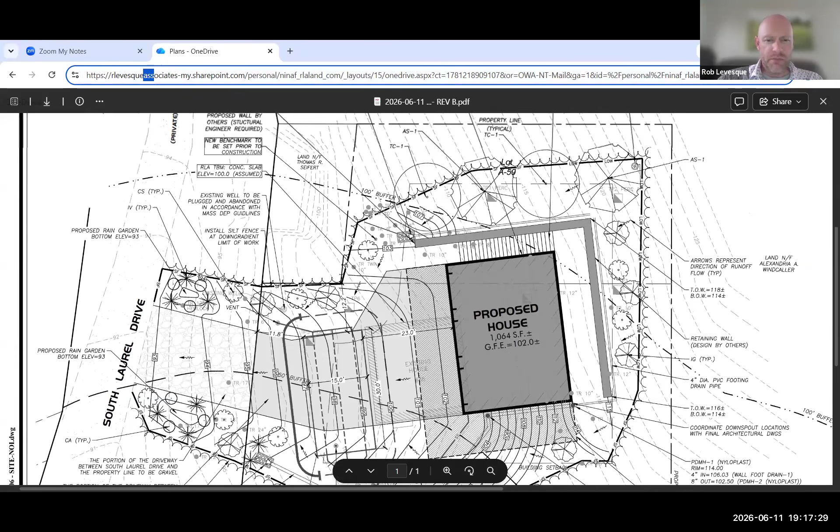So I'm not sure exactly what you're seeing. Hopefully this bar is not in your way. Are you guys seeing the plan? Yep. We see the plan, maybe not the whole plan, but we've got the house pretty centered on what we're looking at. Yeah, I'm zoomed in a little. I can zoom out if you'd like. If there's a way to do that. Let me go. So this is the overall, and then I can zoom in as we go, I guess.

So again, we had the public hearing. There were questions raised related to a number of items. I believe we've addressed all of those. Specifically, we're showing again the proposed home, the deck. There is a retaining wall that you see here. There's also the septic system. Just for clarity, the septic system has already been reviewed and approved by the Board of Health.

There was also, I believe, a question, at least I think we saw it via email, related to the Zoning Board of Appeals. There is no specific filing required based on the review of the building department related to the ZBA, just because we're meeting all of the setback requirements. So I think that was one of the questions that needed clarity.

So that said, the septic system, as you can see, is in the front of the house. There was some concern about the slope, and traversing over that septic system. So we've added bituminous pavement to at least the limit of the property line, as discussed in previous meetings.

I'm sorry, we have dogs barking off in the distance. If you can hear that, I really apologize.

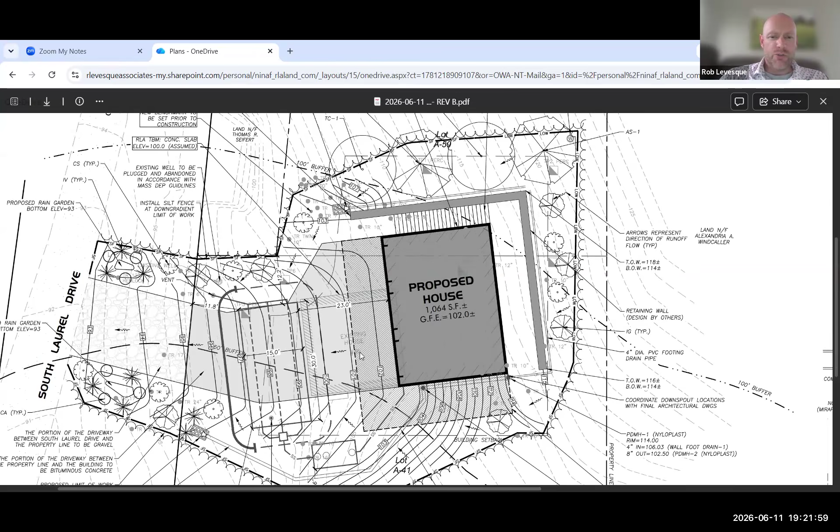So in the process of dealing with that, we did count the trees on site. I believe there was a site visit conducted, and Cole Modesto from our office attended the site visit and quantified the trees and some of the species. And we have prepared, and on this plan, I'll zoom out again. We've prepared a one-to-one replacement of those trees. So within the limit of work, we're showing trees and/or shrubs to be located within the site to essentially revegetate around the proposed work.

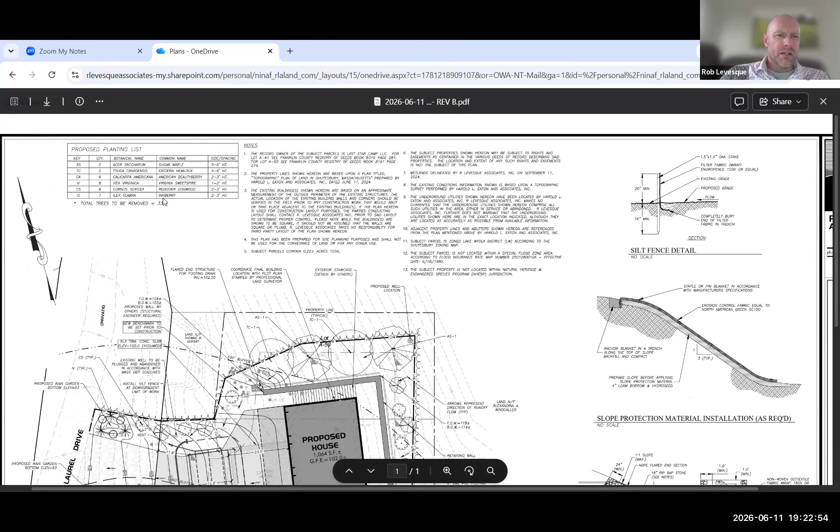Obviously, in the areas that we can provide them. Obviously, don't want them over the septic system, can't go over the driveway or the house or the decks, but anywhere where we felt that we could appropriately site them, we certainly did. So there is a detail of that, the species that are proposed. And there's, I believe, a table if I can find it here. So up on the upper left side of the plan, we have sugar maple, hemlock, beautyberry, Virginia sweetspire, and red osier dogwood, as well as inkberry. So we have some shrubs and some trees.

And again, those have been sited in what we believe is a logical location. Certainly, during on-site activities, if the commission wanted a condition where they were to review the final location, final resting place, so to speak, of those plants, we certainly would be open to a condition such as that. So I'll stop there for a minute and see if there's any questions through the chair, and I can certainly address any other items that you think I might have missed.

Thank you for adding a whole lot of stuff that we've asked for. I think at the site visits and at our last meeting, we talked a lot about stormwater, and I think you guys have really addressed it very well. I'm just kind of looking again, in addition to getting the plan a little late, we got these comments from a member of the public a little bit late, and I'm trying to just go through those to see if there's anything. They do bring up again the potential of moving the septic further away from the wetland, but based on where the well is, I think is the reason that it is where it is, right?

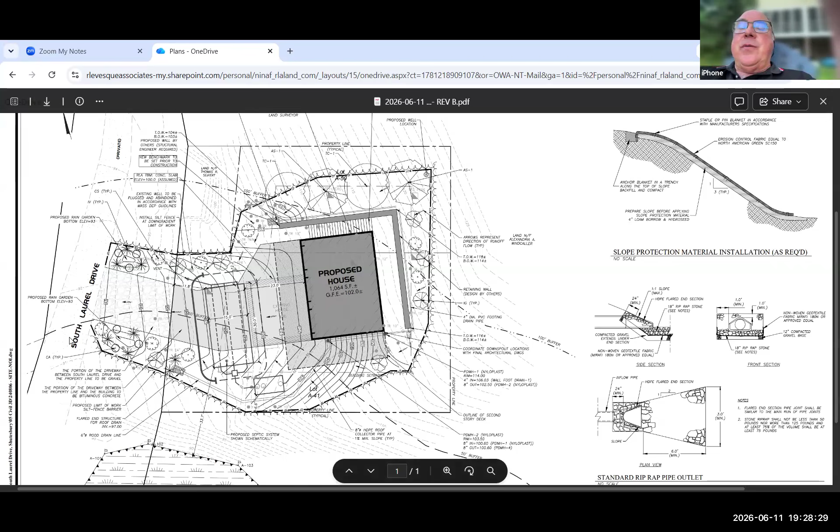So, the commission is issuing a permit for the work to be done on the co-joint lots you discussed. But there certainly is work within the 100 foot that's taking place in that area that's marked Laurel Drive. So I don't think we can issue an order for that because it's not part of the application. If it's owned by somebody other than the proponent, we would need their signature on it.

So if you could, before our next meeting, look into the ownership and the feasibility of doing that work. Is there an easement that allows this type of construction on that? Can you get a signature from the owner or whatever? Because I don't believe we can give an order of conditions for a piece of property that's not part of the application.

That's actually great, it's nice to get some accurate procedural questions. I tend to agree that we want to ensure that if and when the commission decides to issue an order, it's procedurally correct. I think Linda has a response to that because we talked at the site visit about it and the Gribcos looked into it, right? Yes, we did.

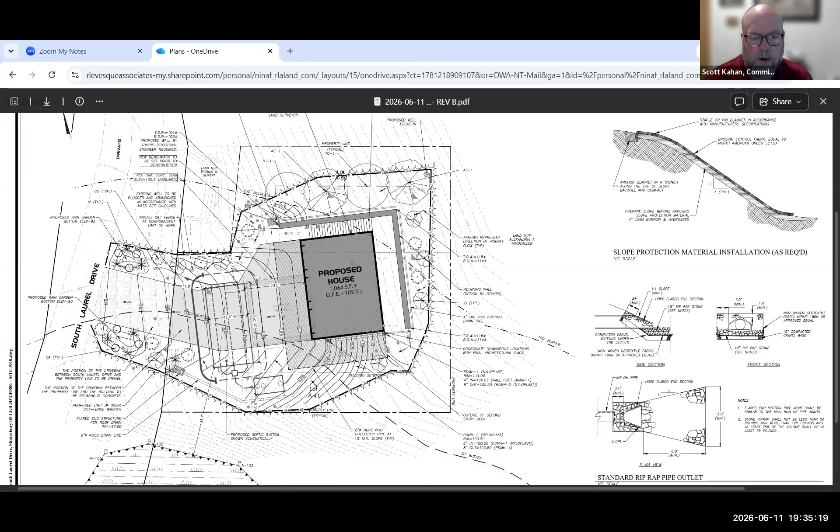Gotcha. So the water from the rain garden, you expected it would infiltrate the same direction, part of it going west, maybe ground into the lake, maybe part of it going south into the wetland. I think that's an accurate statement. Yes. Okay. And that relates then to my next question, which is the leaching field, which isn't that far away, but half of it's contained within the 50-foot buffer.

I'm thinking about nitrogen and phosphorus coming from the leaching field and going into the wetland, and I was going to ask about the permeability of the soils and if we expected it would go there, but it sounds like from what you just said about the rain garden, you would expect that it would go there, down to the wetland. The leaching field may leach into the wetland to the south.

So what I was saying about the rain gardens is that if you get a microburst or a large storm event, eventually the rain gardens would fill up and sheet flow generally to the west. But you can see the contours kind of bend here. So depending on where your water droplets are, or if they come off the slope, they could go towards the wetland. As far as the leach field, obviously we need permeable material under Title V. They allow anywhere from 2 minutes to 60 minutes per inch.

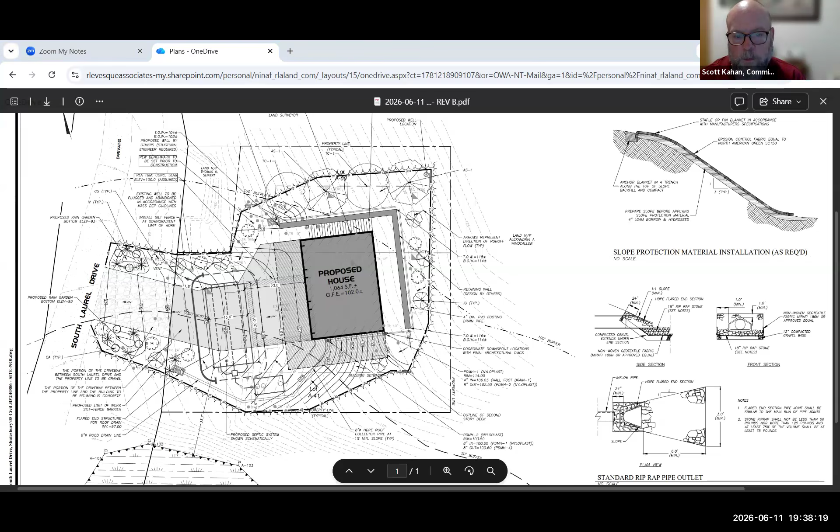Yeah, I understand it, and of course you understand this too. The Board of Health is probably looking at it differently. They're looking at the impacts on human health and the Title V regs. This is being constructed in the buffer zone, in a protected wetland. And so I'm most interested in: is there potential for the leaching field to impact the protected wetland, given its close proximity?

Understood. There is an impervious barrier included, I've noticed, in the septic system design that would prevent horizontal migration of effluent, at least superficially. Let me just see if I can find the rate for you as well.

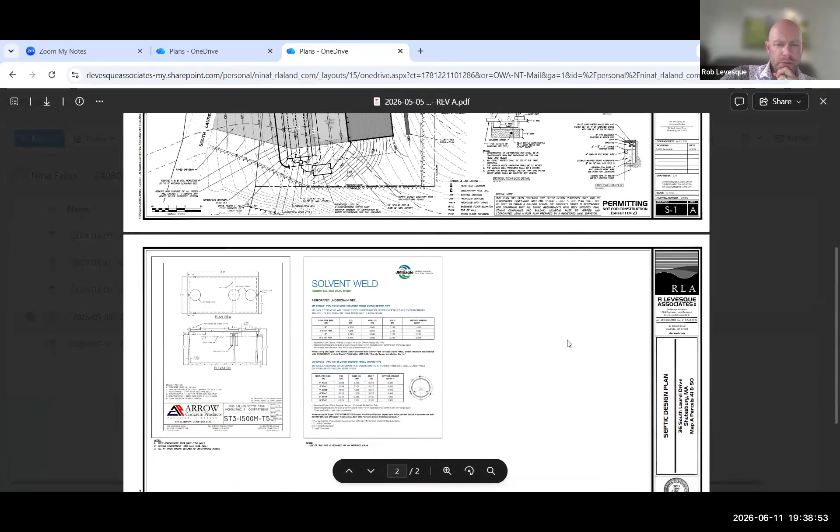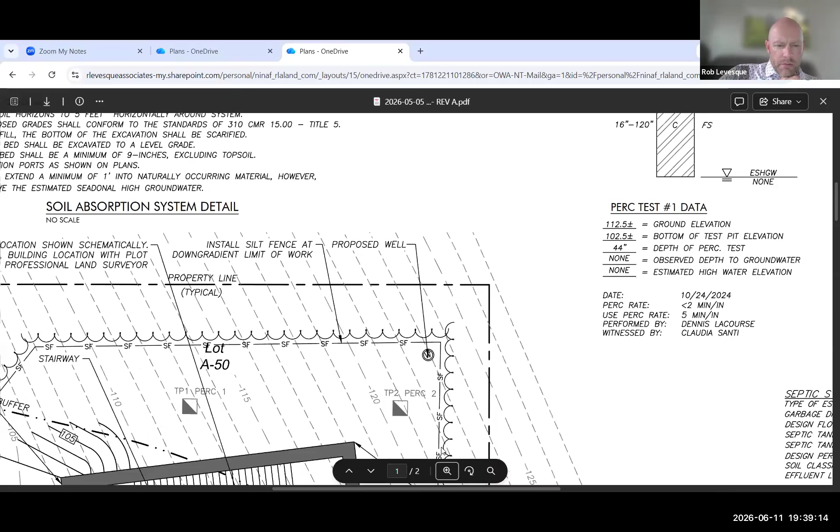Let me see if I can stop sharing and then I'll start again. Share. Let's try this. It'll look much the same, but this, I believe, will be the septic plan. Here we go. Bear with me, sorry.

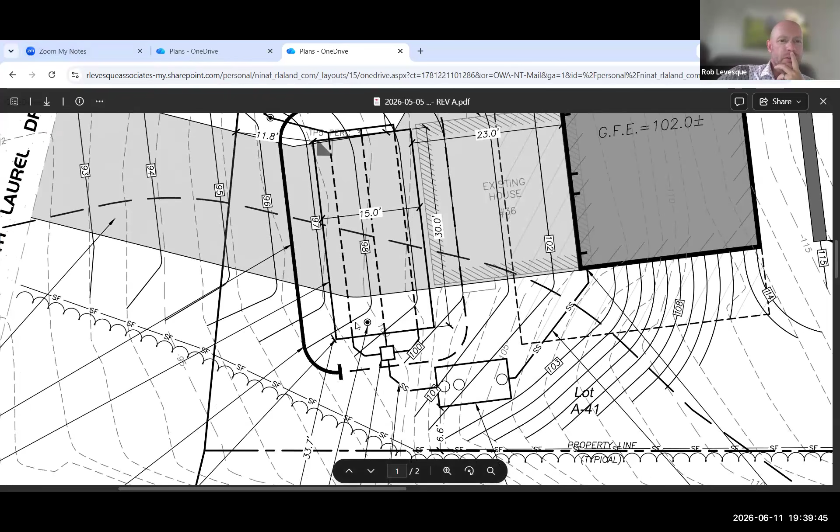So this is an impervious barrier around the leach field itself. It certainly could be extended. There are no issues with extending it, so we could always extend that, I guess to the south, to further protect the resource area, not necessarily prohibiting, but certainly inhibiting migration of material to the south. Let me see if I can find that perc rate for you too.

While you're looking, Rob, that's okay on the perc rate, but I'm wondering on the purpose of that barrier that you just showed. Can you articulate why that was put into the plans here? Sure. So generally speaking, under Title V, the leach field is required to have what they call a breakout distance, a distance horizontally from the field so that you don't have any effluent breakout, or daylighting. Sometimes if you have a 3-to-1 slope on the side, they want to make sure effluent doesn't migrate away from the system and then seep out, so they have you incorporate an impervious barrier.

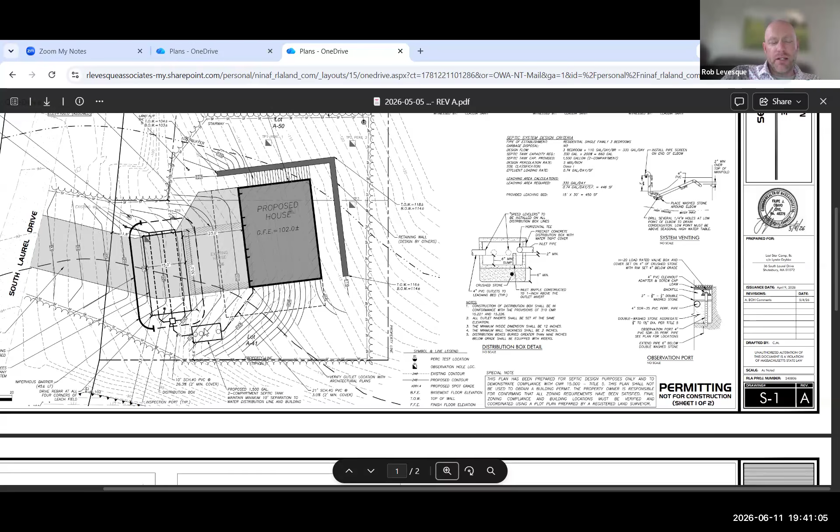Sometimes we do a belts and suspenders approach where we'll do that regardless. So on the downhill side of the system, generally towards South Laurel Drive, this darker line here is that impervious barrier, which certainly could be extended as a condition, and in revised plans we could extend that around the corner. That would ensure that breakout prevention is provided towards the resource area. So good comment, and I think that's a pretty good way to address it. Belts and suspenders, but it wouldn't hurt anything to put it in.

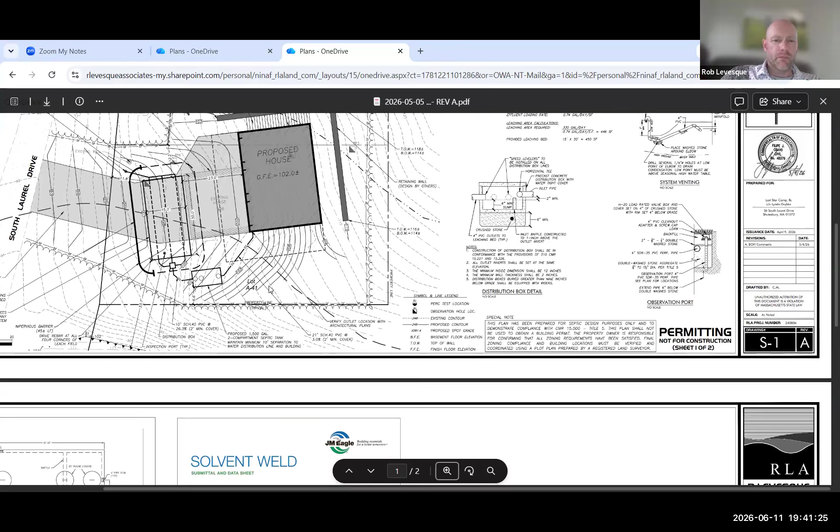Yeah, great. Thank you. Those are all the questions I had. Okay, thank you. Thanks, Rob, for showing the septic plan. Sure. Lynda's got her hand up. Yes, Lynda?

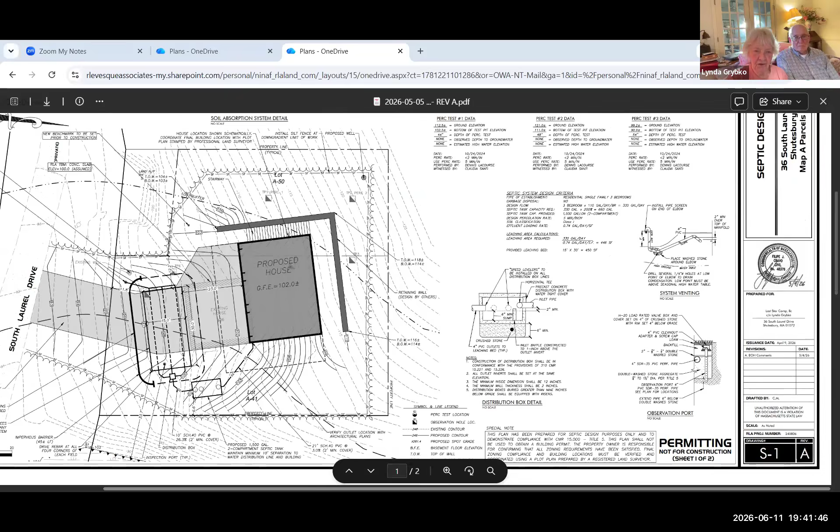Just one more comment. We've been there for 33 years, and we have had some pretty good microbursts. One washed out North Laurel Drive, didn't wash out South Laurel Drive. But I will agree with Rob that when the water comes down South Laurel Drive, it actually migrates toward our driveway at 35 toward the lake, and Rich Reel's driveway next door. It doesn't go uphill toward the septic system.

It's actually washed out some in front of the parcel owned by Seifert, that little 40 by 60 parcel that's indented into ours, and we have in the past brought gravel and filled that in. So the runoff from the road never gets as far as the wetland down below. It turns before it gets there. I can't say the same will happen with a paved driveway, and Rob has addressed that.

Lynda, let me just clarify my question. Mine wasn't so much about the flow coming down the road. It was flow coming from where that new drain would be installed and moving down that way. When I was standing there looking at the proposed house, the wetland off to the right was quite a bit lower than where we were standing. So it seemed that some of the water coming off that hill may wrap around that way. That was really the question I was asking.

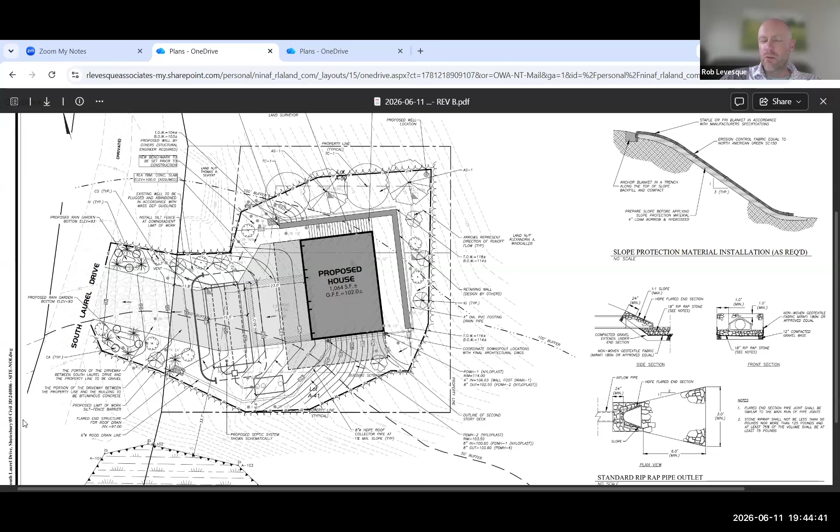Also, you see these curves to the contours, so that will capture the water and direct it towards the rain garden. It's a slight high point, not a gutter so to speak, but a little grassed swale or subtle change in grade that will direct everything towards this rain garden. Anything that overflows goes to South Laurel Drive and would continue as it does now. So it shouldn't introduce any real direct flow into the wetland to the south.

Great. Thank you. Yep. All right, Michael, you have your hand up?

Yeah, apologies if I missed it, but in one of the other diagrams you had, it looks like the road surface was, like, I'm guessing little stones, or I was just wondering, we had talked about having half paved, half stone, and I just can't remember where we landed on that.

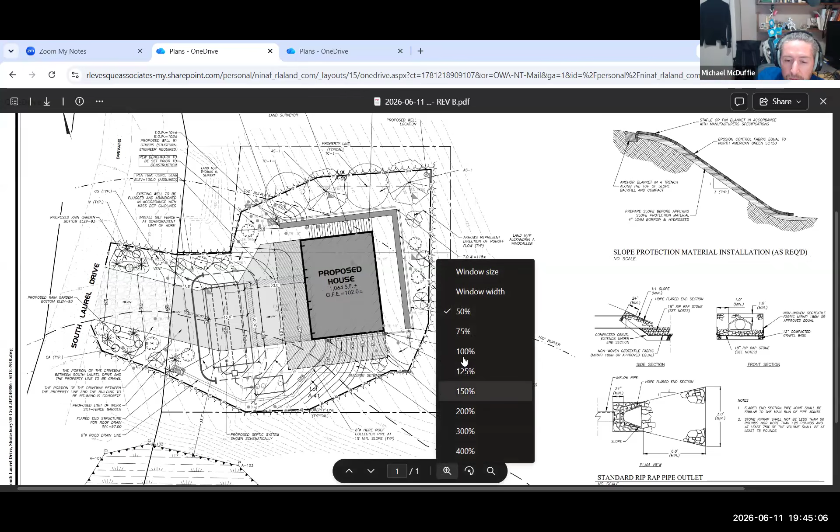Yeah, thank you. And you are accurate. It's a little hard to see, I apologize on the Zoom. So this is to represent a gravel drive. My understanding was the request was to have gravel to the property line and then have a bituminous paving or asphalt over the septic system and in the area of the travel path, so that no material migrates or no ruts are happening, and it stabilizes that area, and again stabilizes the area over the septic so that doesn't get disturbed as well.

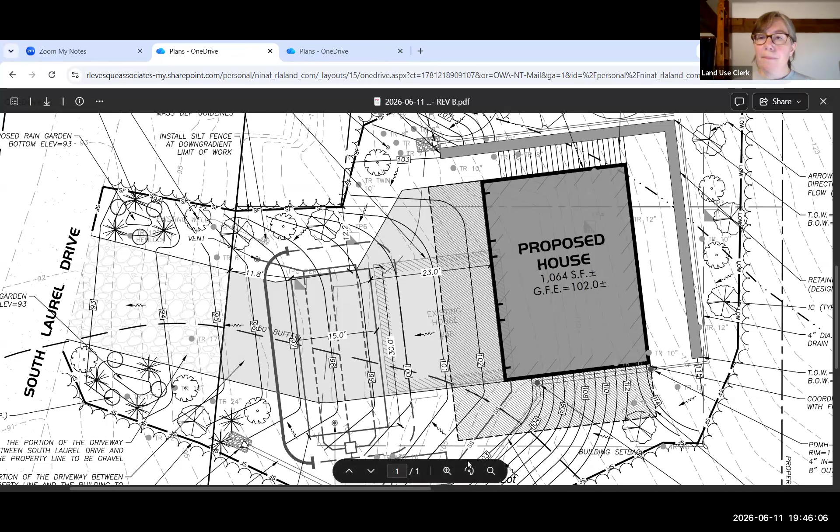Okay, thank you. Yep, and the septic system, just so everybody knows, will have pipes that are robust enough, the H20 loading, so you can drive vehicles over them and they won't be crushed. We won't have to worry about that. So that's all in the design as well. All right. I see no other comments from the commission. Are there any questions or comments from the public?

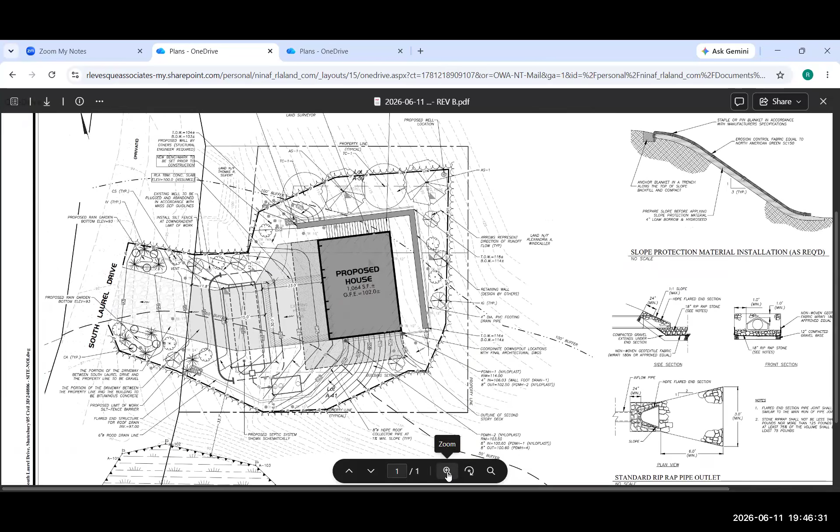Alexandria, you have your hand up? Yes, hello, everybody. I have a few questions. One about this general project, and I did hear that the zoning board okayed this. Is this being proposed as a rebuild, a reconstruction, or a new house? I understand that the existing building is non-compliant, but are you approaching this or proposing this at the building and zoning as actually a new house because it's a new footprint? I don't know the original size of the house, but it looks like it's about 3 times the size of the existing home.

Yeah, I can answer that through the chair, if that's okay. So generally speaking, there's 3 buckets really we're dealing with here. We have the conservation bucket, what I would call a zoning bucket, and the Board of Health Title V bucket. So tonight we're dealing with the conservation related to disturbance on the lot. If the chair would like to entertain my response on the ZBA, it's a pre-existing non-conforming structure. It's a pre-existing non-conforming lot.

So there are provisions in the zoning that allow for redevelopment of this nature, and they're very specific to the zoning. We met early on and have communicated at length with the building officials and the zoning enforcement officer who determines the nature of what needs to be filed. So certainly would be happy to clarify that. But if you do have further questions, they are very helpful and can shed some light on the zoning related aspects of what we're submitting.

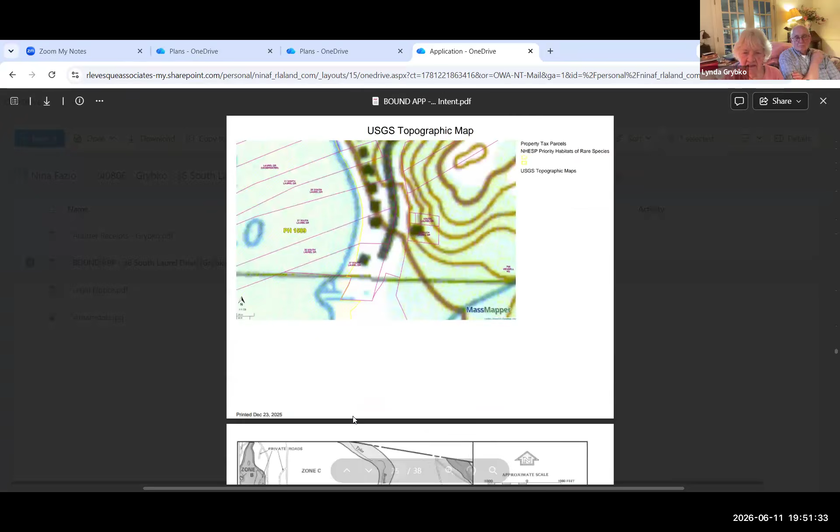And they did quite an extensive title search on the roads before they decided that it was too complicated and they could not actually give a title to a deed, so they couldn't transfer it. So I can't answer that question. I know that she is the one who gets the tax bills. So she's the spokesman for the group. Right. Yeah. I mean, she also tried to give it to me too. So that's why I know this a little bit. And so the deed is actually a trust. And so this is a bit of the quagmire. So, because a person pays taxes on something does not necessarily mean that they actually own the property and can be authorized to approve that.

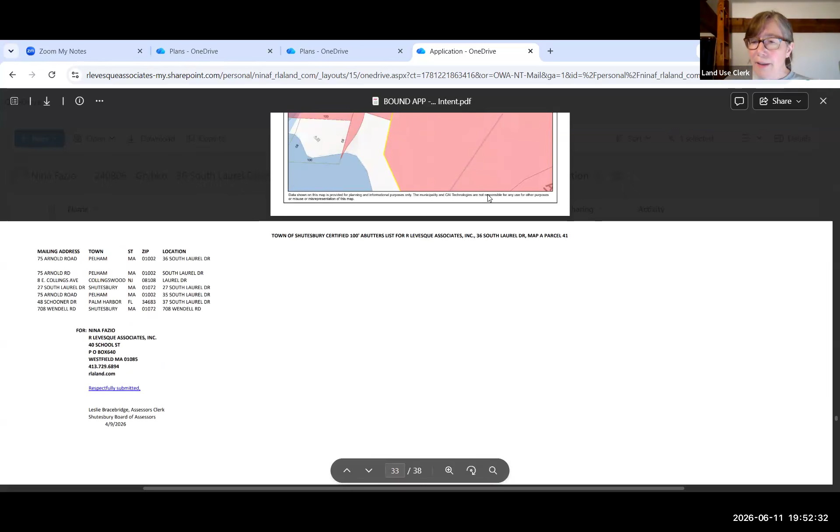Yeah, so it sounds like before the next meeting, maybe Rob and Lynda, you can look into a bit more about that and find out who, for every trust, there's someone who is the signatory for a trust. And if you could find that out, and then if we could get the page of the notice of intent application, there's a section there for where owners sign. And if we could get her signature added as an owner of some of the property where the work is happening, then that gives us the right to then issue a permit.

Understood. Yeah, absolutely. I'm trying to decipher the abutters list, and it's hard to tell what would be a trust or not. Maybe the trustee would be listed. I don't know if you can see my screen. Yeah, we can see it. There's some names, but we can certainly investigate that. Probably not to dig deeper than we need to, but I certainly would want to make sure that we were procedurally correct, to the other gentleman's point as well. So if there is in fact another signature and we are submitting, and this is not an expense that I would want my client to have to go through, but just from a procedural standpoint, it might be prudent to re-notify prior to the next hearing.

Only because if there is an applicant, technically I guess it would be an applicant, right? An applicant and or owner signature. I would want to just make sure that the Form 3 that gets submitted corresponds with the proper signatures and any abutter notification. For example, if we are now including another parcel that's a party to the application, then probably procedurally correct would be to re-notify. So we could send out abutters lists, and it's going to be redundant for most people, but it might be procedurally correct that way. I hate to say that.

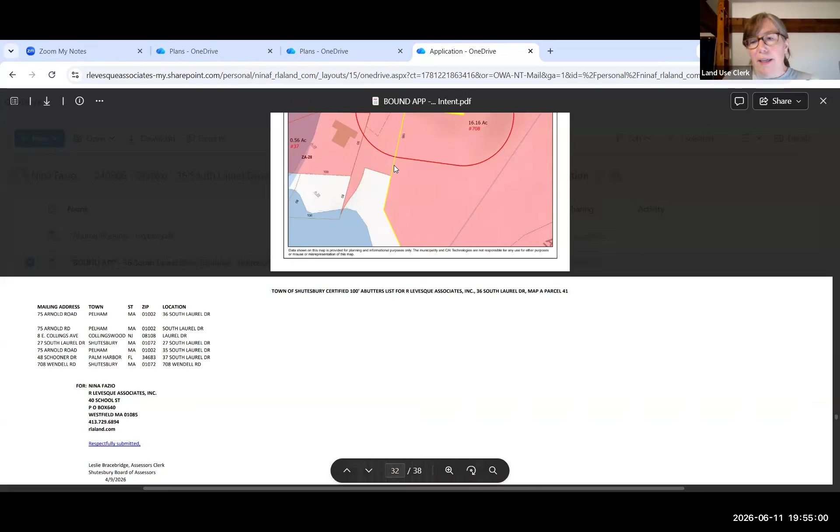I'm pretty sure the ownership line has nothing to do with the actual applicant, but we can look at that. Okay. I guess the only thing that I think you're trying to say is that if you hadn't already added that parcel, that's actually the road, as one of the parcels that the work is being on when you were getting your abutters list, then maybe there were some abutters that didn't get notified, because that is really a parcel also where the work is happening. It looks like it's included, but I need to do a little more digging. Okay, well, we'll talk more about that offline, like what's really needed for that signature and everything. Okay, that sounds good.

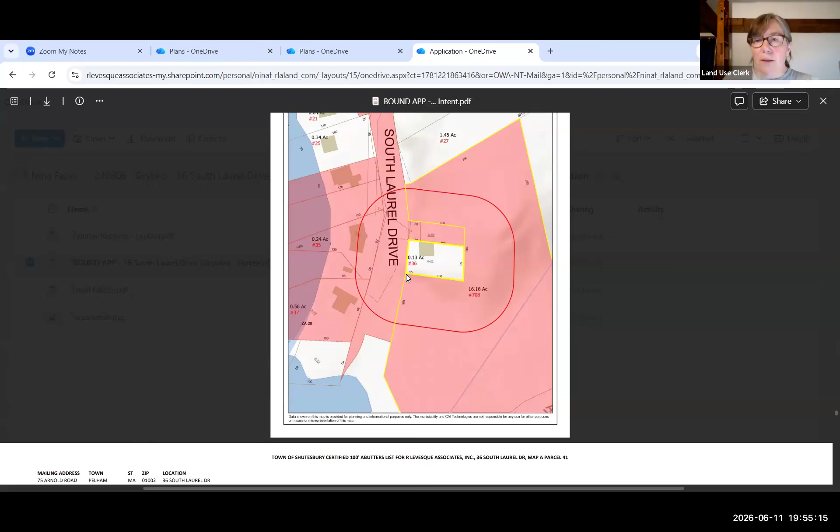Thank you. Sure. Jennifer, you have your hand up? Oh, I think you're muted. Okay, here I am. Yep, here I am.

Okay. Hi, I have a question about these rain gardens. You had mentioned that they will kind of function as a retention pool. Yeah, it's more of a plunge pool. I can explain them a little more. Yeah, no, I understand what a plunge pool is. And you mentioned that if and when they fill up, the water will sheet onto the road or to the wetland. Yes. Did I get that right? Okay. So I'm not really sure, and I'm not sure it's relevant necessarily, the dimension and the depth of these pools or plunge pools, but I live on such a road that has retention pools, gravel road, and they routinely fill up with debris and don't function the way that they were intended to function.

And also that often happens seasonally when there are not many neighbors around to help to maintain them. In fact, I think when the project was approved by the Concom at the time, they had an order of conditions that required annual maintenance of these pools. So I just don't know anything about the way that these plunge pools would be constructed, but if it follows form, they're going to fill up, especially on a slope like that. So I don't know if you have thoughts about that.

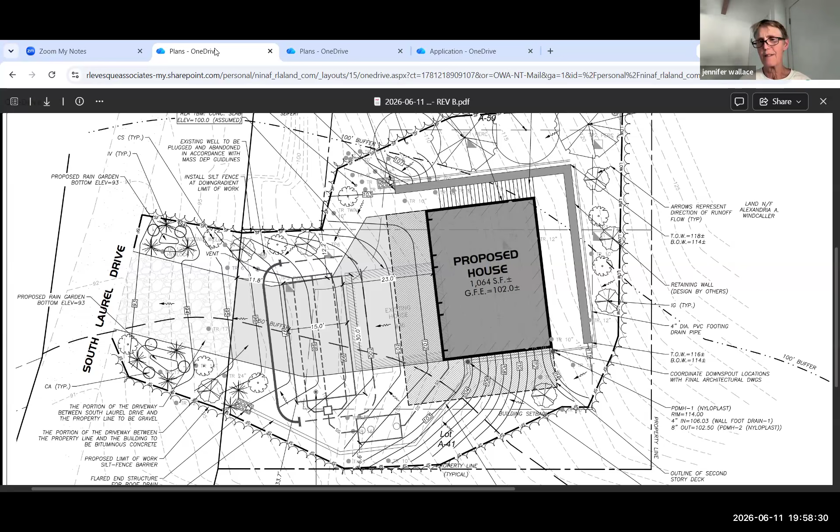Yeah, I'm observing that the plan asks these plunge pools to do an awful lot of work on a slope like that. So having some kind of regular clean out of the sediment that's going to collect there seems like a good idea. So thank you. You're welcome. Thank you.

Yeah, and I think the Concom, under our conditions, what Rob was talking about in terms of having an affidavit, even having a requirement that the homeowner provide some sort of a completion checklist to the Concom once a year that they've cleaned out their rain gardens and their whole stormwater system, is something we can think about doing.

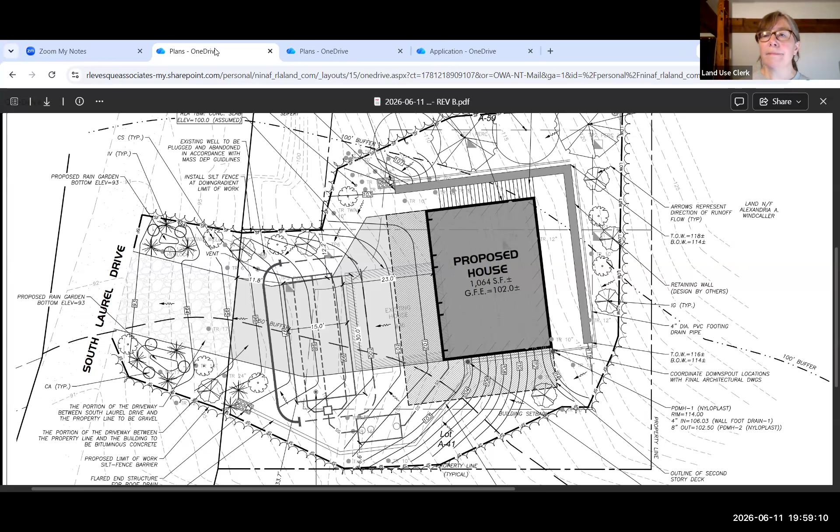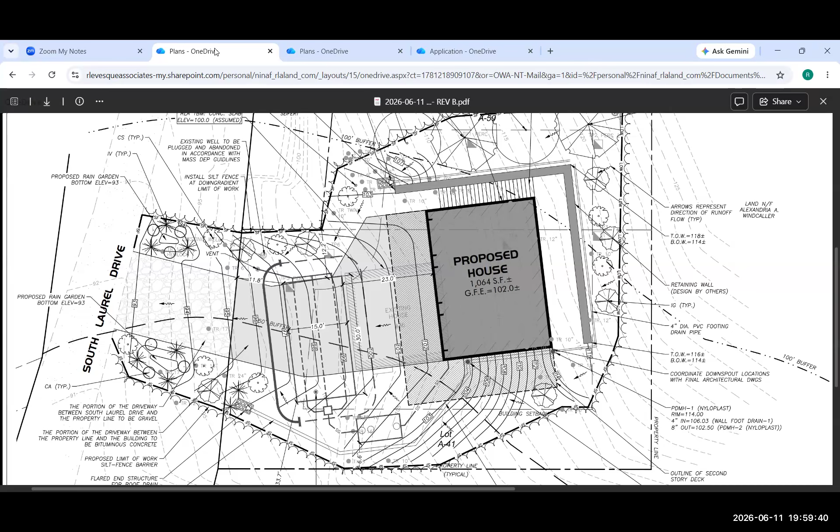Frank? Thank you, Madam Chair. Mr. Levesque, I noticed that on your proposal, you have all the rainwater from the French drain and the gutters going to the street level, but one on the north goes directly next to my property, and you'll be flooding my property with extra water. Is there a reason for that? That's a good question. So can you do the same thing on the north side that you did on the south side, so it doesn't burden my property with excess water?

I think that's a fair... Sorry, go ahead. I didn't want to cut you off. No, that's fine. You're funneling water into my property, basically. Gotcha. Yeah, I understand the perception of that, and it's not necessarily incorrect. I think the subtlety is the wall itself, the perforated pipe behind the wall is gathering any sort of groundwater flow down to the footing of the wall. So I would expect, if any, a very slow trickle of water out of the slope. I guess in a major event, because of the permeability of material, you could have that.

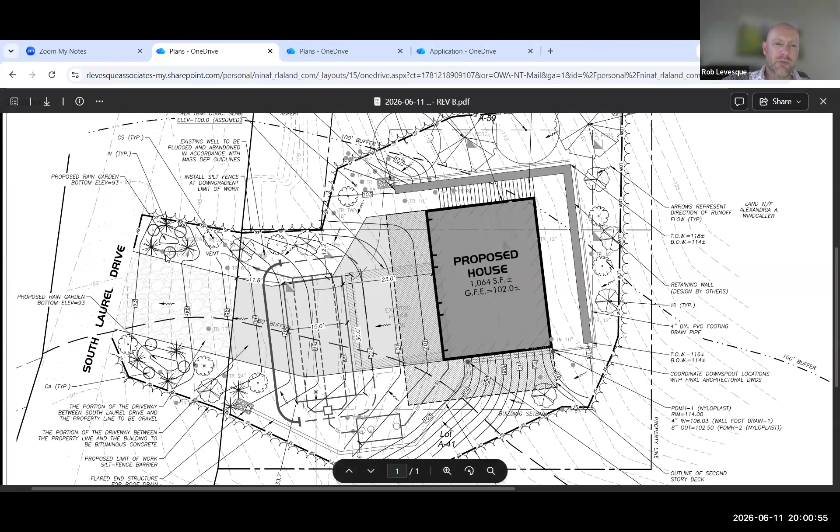So I don't think it's an unreasonable ask for us to reroute that, essentially jogging that, I'm gonna call it south, if you follow those little arrows, if you can see my arrow. So from the outlet, there's no reason we couldn't extend that and direct it, and the slope is kind of going this way. It would certainly keep it away from this parcel here, sir. So yeah, that's not an unreasonable ask. It's a pretty easy change.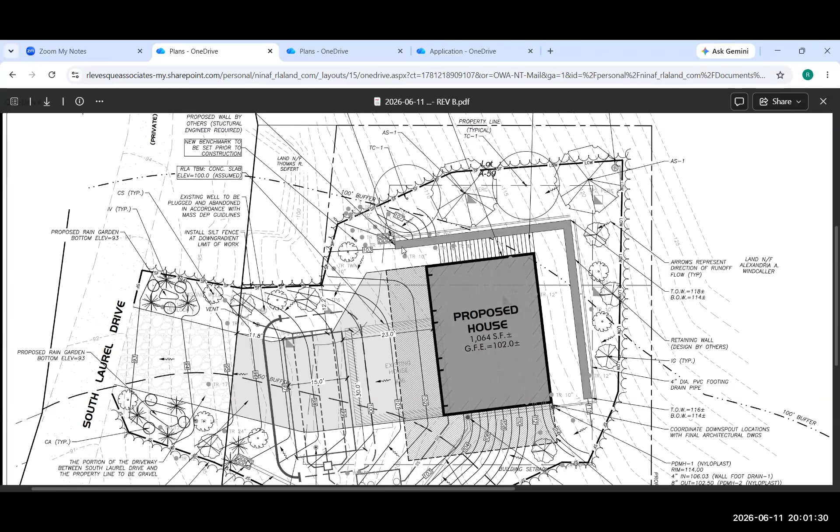But the reason why we just daylighted it is this is a very subtle perforated pipe, and most of the water would be picked up in this because of the nature of how the water flows. This will intercept most of it, but belts and suspenders, we could certainly adjust that for you. Thank you very much. You're welcome. I had a question too about, will this project in any way change the contour of the road?

Or can we put a condition in to ensure that the contour of the road doesn't change? Good question. So we have no grading on the roadway surface at all. The gravel roadway will be tying in. That's kind of our controlling grade, and then we come into the property from there.

So yes, certainly we're not planning on changing South Laurel Drive. Should they decide to regrade it or maintain it, obviously they would incorporate whatever they do with the surrounding driveways. But we are tying into the roadway as it exists with no changes to the roadway.

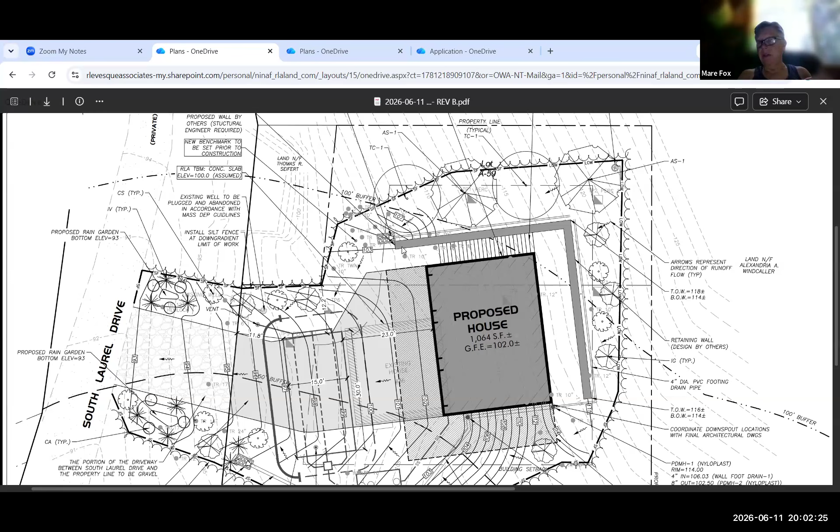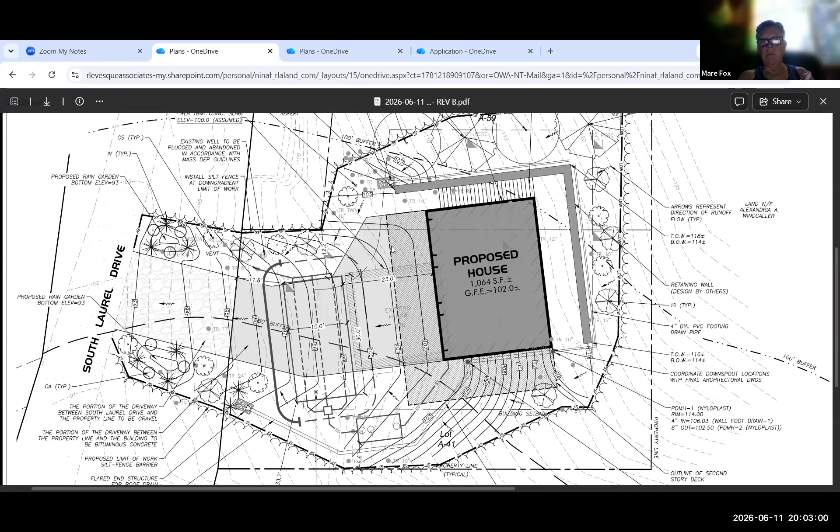And since you are here, at the last meeting, one of the conditions that I would like to see is that there be documentation of what the road looks like currently and to ensure that it doesn't change, not just in front of this house, but the entire length of the road all the way up to the dirt part of Wendell, because if you're bringing trucks in, it changes the contour of the road, and or vehicles are being brought in to build this house. It happens regularly, and I just want to make sure that we protect against that.

Yeah. So, and I want to be respectful as I answer that, so try to answer that correctly. The scope of the notice of intent certainly includes the area with the activities we're proposing. So any sort of work that we're proposing certainly would be part of the order. The outlying areas of South Laurel Drive, while it's certainly something that I would hope the Grybkos would communicate with the owners, the trustees of the road, and certainly is a good idea. And I think just being good neighbors is always a good idea.

That said, I don't know that it's necessarily within the scope of the current notice of intent as filed. So I don't know how that would be conditioned. Certainly, I would hope that, and maybe the Grybkos could speak to that more appropriately. I'm assuming they want to be good neighbors and make sure that any sort of subtle damages to the road would be addressed. Lynda, do you want to speak to that?

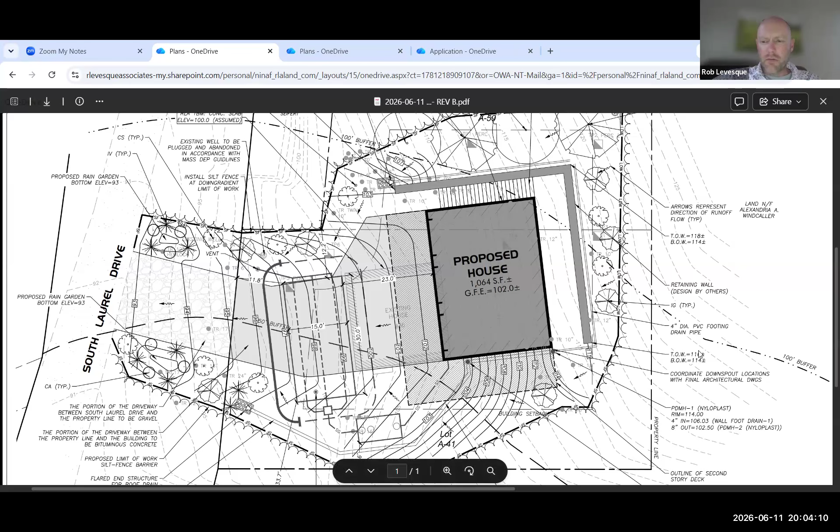Sure. That road has been regraded again and again and again. Part of the reason the upper part of the road is regraded is because the water flows down into a house that's right at the bottom. Exactly. I'm sorry? I said exactly. Yes. And I mean, we have no intention of changing the grade of the road.

If the trucks that bring the materials down, well, two things. First of all, the trash trucks come up and down the road every week. And I don't know how many wheels the trash trucks have or how much weight they carry, but I'm sure they carry a fair amount. They're big. Yeah, as Mike says, they're big. But if there's any obvious change to the road that is attributable to our construction, obviously we would correct it.

We all try to keep the road in good condition, and it deteriorates over time because it's gravel. We've brought in more gravel to fill the ditches, especially in front of our next door neighbor where the water seems to pool, not in front of our house, but in front of theirs. And we brought in a whole load last year to fill in that ditch. It wasn't in front of our property, but it was still a ditch. So as a good neighbor, we filled it in.

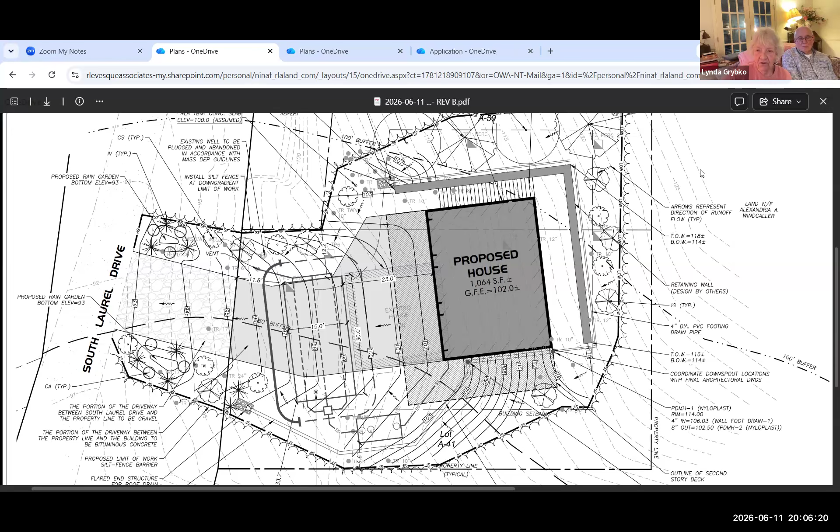All right. I don't see any more questions. No more hands up at this point. Rob, do you want to stop sharing, just so I can see everybody's faces? Oh, I'm sorry. Yeah, absolutely. Thank you. All right, thank you.

Okay, so I think at this point, is the applicant in agreement to continue the public hearing until our next meeting, which is June 25th? Yes, please. All right, and does 7:15 work again for you guys? It would for me. I think it works for the Grybkos as well. Let me just check. June 25th, sure. Okay, that's fine. Great. All right, so then I'm looking for a motion from the commission to continue this public hearing until June 25th

at 7:15. Could I just, and I'm sorry to interrupt, I just want to recap. I just want to make sure I'm getting you guys everything. Yeah, so I was going to recap after we take the vote. Oh, perfect. Okay, then I'll be quiet. Sorry. Okay. Looking for that motion.

So moved. All right, second. I'll second. Okay, roll call. Fox. Aye. McDuffie. Aye. Douglas. Aye. Kahan. Aye. And Wilson. Aye.

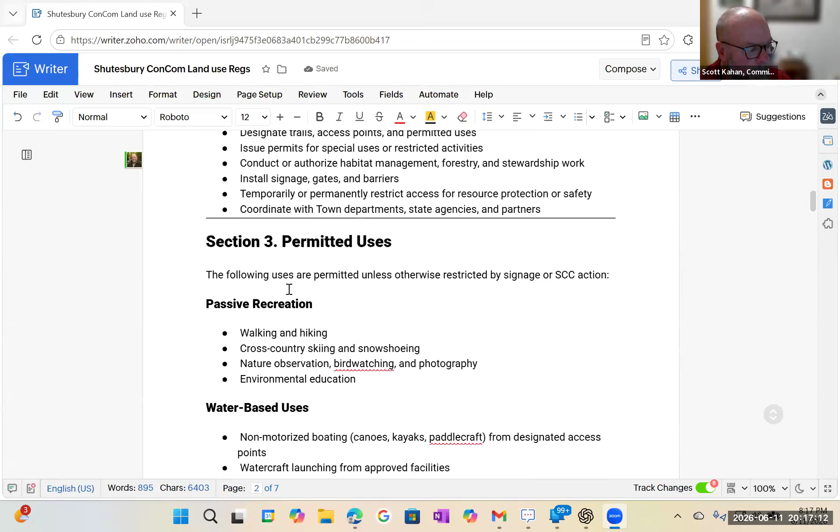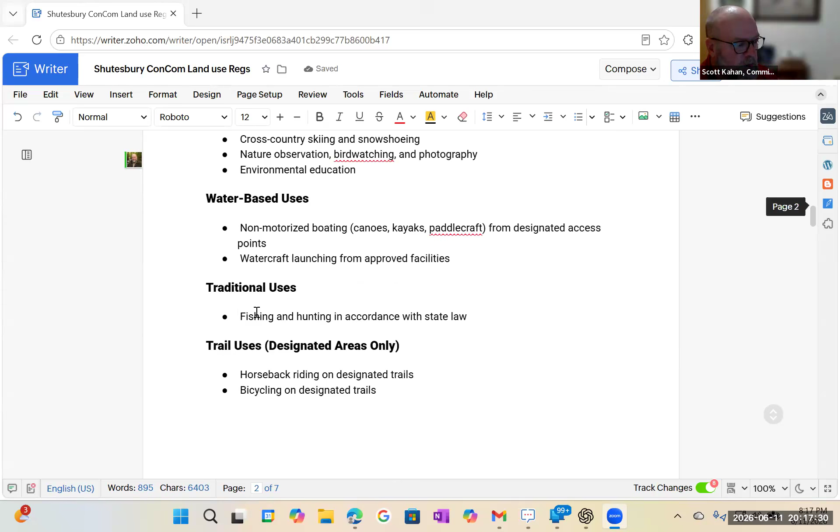So these are the draft regs we had visited last time. I'm going to go through this pretty quickly and just focus on the areas where commissioners had suggested changes. In the beginning, we talk about our authorities, we talk about the purpose. This is broken up into permitted uses and uses that are prohibited. Under permitted uses, we talked about different types of recreation that would be allowed, water-based activities, traditional uses, trail uses.

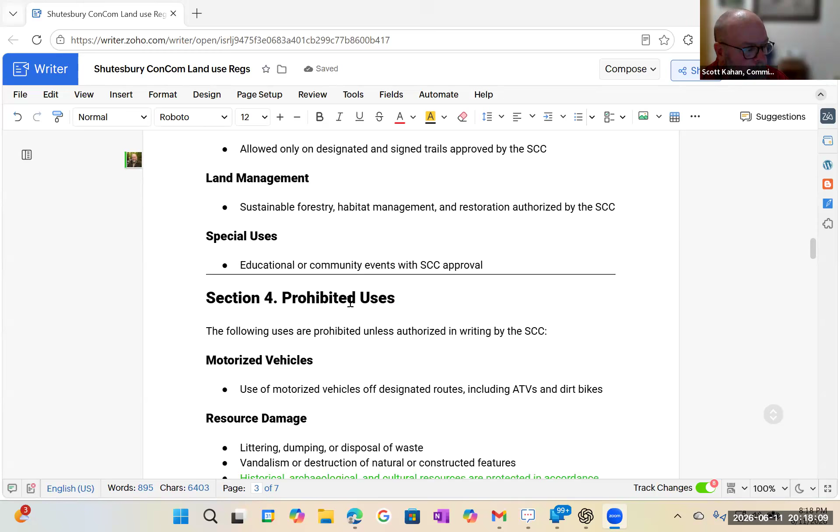We had a conversation on snowmobiles, and recognized that some of the conservation units under our oversight allow snowmobiles. They have deed restrictions that allow them already. Southbrook, the unit we were just talking about, and those trails would be a good example of that. So we said that this would give us an opportunity to designate those trails where that would be allowed. Land management and special uses. We talked about prohibited uses.

Here is one where we had some suggested changes, and it was suggested that under resource damage, we add in that historical, archaeological, and cultural resources that are protected with applicable state laws and regulations may not be disturbed, removed, or damaged without proper authorization. So that's the change to the original based on some of the comments folks had last time. So maybe I'll stop there. I can't remember, was that you, Bob? I can't remember who had raised that, but if that addresses the concern or the comment.

I think it looks good, Bob? Oh, there he is. I don't think so.

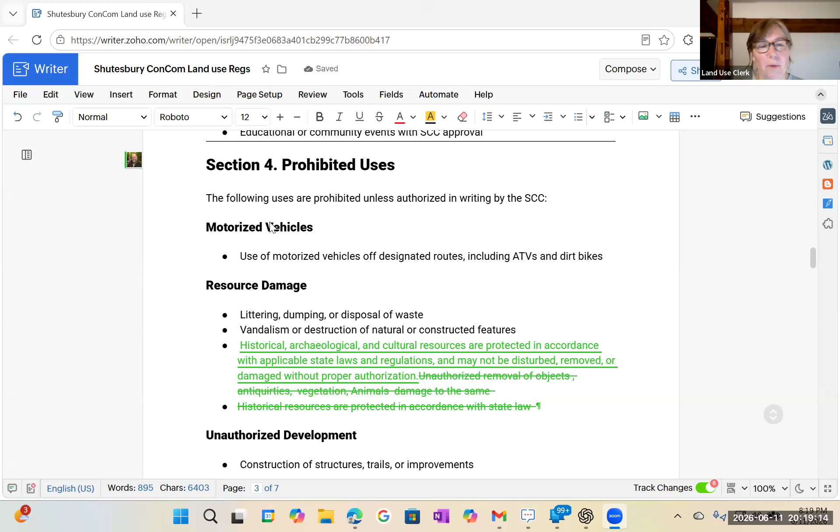I can't remember who brought it up, but I think what you wrote is perfect. Looks good, I agree. It looks good. Okay, great. We think we get rid of this incompatible recreation based on the conversation that we had. I think that was a good deletion.

Under fires and camping, I think this one was you, Bob. It just added in this sentence, camping. This is under prohibited uses, so camping, except as authorized by a special permit issued by the Conservation Commission, recognizing that there might be particular things like a scouting troop or something that wanted to camp there and would want to entertain it. So I made that edit. Great.

This one, we changed it to broaden it. I think I was focused on Town Beach because that has been the area where there have been concerns raised, but I broadened it just to talk about abandonment and storage of personal property, recognizing this is for all of our lands. So it reads now, placement, storage, or abandonment of personal property, including boats and or watercraft

on conservation lands or the town beach without authorization from the Shutesbury Conservation Commission. So this again is under prohibited activities. I think it was a good suggestion to broaden it. Could Town Beach be described as to what the location is?

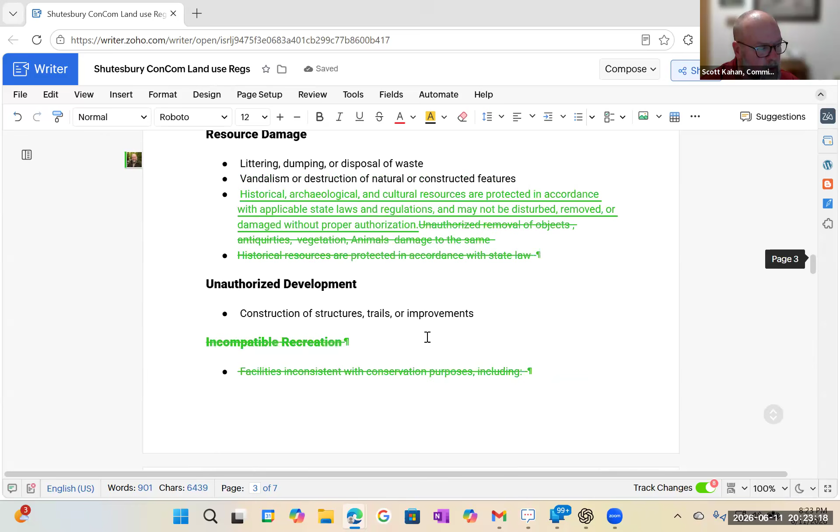And so, unless there are any other items here to talk about, I think the next step would be to put this in front of town counsel and the police chief, since they would be the ones enforcing it and or reviewing it for legal sufficiency. We can get their comments back, and then we should be in a good place after those are incorporated to talk about having a public meeting and finalize these. I think that sounds like a great plan. Sounds like the right way to approach it. Looking good. Thank you for putting those together, Scott. You bet. They're great.

All right. How do you want to proceed with that, Madam Chair? Do you want me to send you this cleaned up copy and then you transmit it to Donna and to the chief, or do you want me to send it to them, or what is best? I'm fine with you sending them, CCing me and Mateo. You could also send it to Mateo and have him send it out, so there's continuity in the email traffic. Yeah, that's a good idea, that's kind of his role. Perfect.